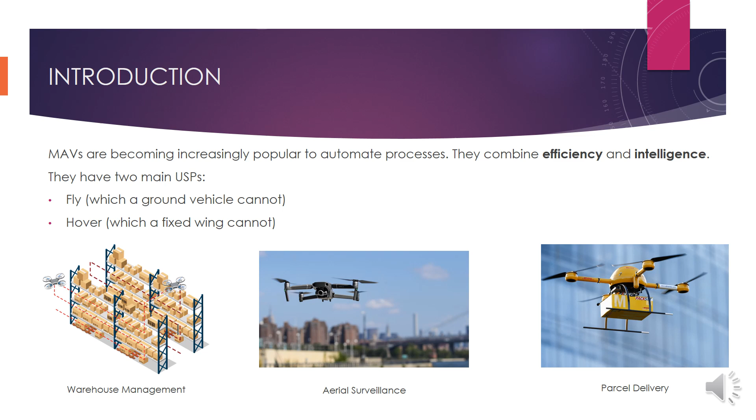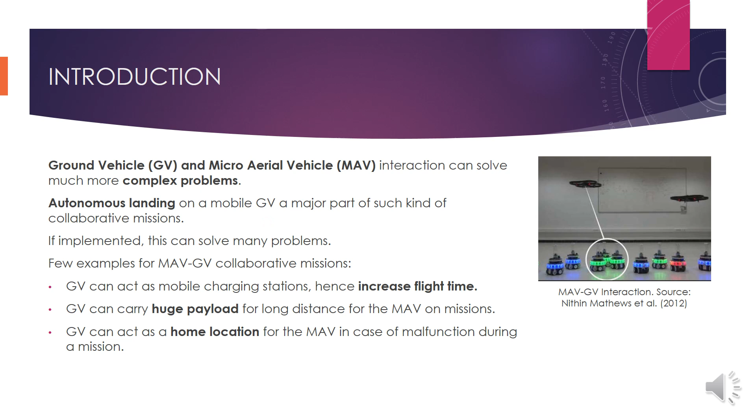So now let me present you an idea for GV and MAV collaboration for much more complex problems. A few examples could be that GVs could act as mobile charging stations to increase the MAV flight time. GVs can also increase the payload capacity of the MAV, and they can also act as home location for emergency landing. But the main problem in such collaborative missions is the landing of the MAV on a moving ground vehicle. And this is the major motivation behind this study, and the motivation is to solve this problem.

So from the literature survey, a few trends in the research can be seen. First is that most of the research has been done for fixed wing UAV landing. Another major area of research has been precision landing of multi-rotors on fixed targets. And whatever research was done for landing on moving targets, there were a few main assumptions. First is that the ground vehicle was moving in a straight line, and second was that the ground vehicle showed a cooperative behavior with the MAV.

So the novelty of this work is to get rid of these assumptions by having no prior assumptions or knowledge of the ground vehicle motion. And second is to develop a wind tolerant controller that makes the system suitable for outdoor operation also.

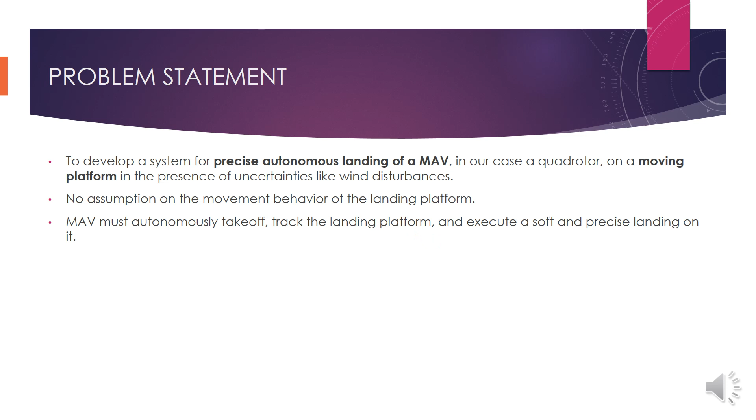So our problem statement is to develop a system for precise autonomous landing of a MAV on a moving platform in the presence of uncertainties like wind and without any assumption on the movement of the landing platform. So in all, our MAV must take off, track the landing platform and execute a soft and precise landing on it.

So now we come on to the methodology part of the implementation. Everything starts with the takeoff of the drone. Then a condition that checks if the MAV is close enough to the GV within a threshold. If not, then it goes on to the tracking phase, that is, it is far and the ground vehicle needs to be tracked. And here path planner one generates the trajectory. When the trajectory is being followed, every time this is-valid condition is checked to prevent the drone from going on a redundant trajectory. So an online update of the trajectory is performed if the trajectory is invalid.

Now, when the tracking is complete and the drone is close to the ground vehicle, then it goes into the catching and the landing phase. Here, path planner two generates a trajectory such that the drone can come very, very close, almost above the ground vehicle, and then land on it.

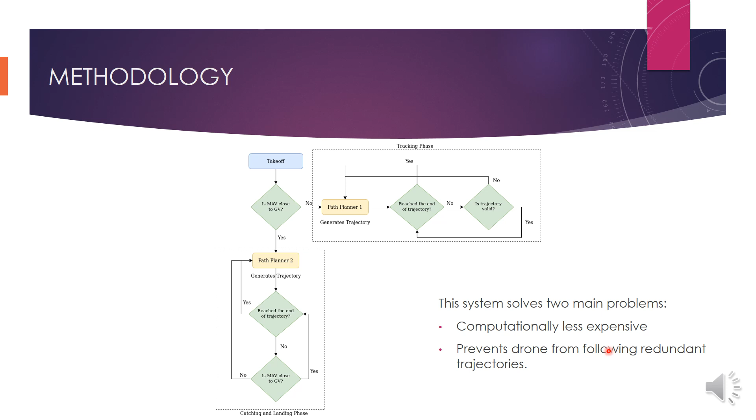So this kind of system solves two main problems. One is that it is computationally less expensive than algorithms like MPC, which perform online computation at each time step. And second is that this prevents the drone from following redundant trajectories using the is-valid trajectory condition.

So now coming to the controller design, the first step in controller design is to define the quadrotor model. So here we have a quadrotor in the plus configuration. E1, E2, E3 is the inertial frame of reference and B1, B2, B3 is the body fixed frame of reference. For the quadrotor dynamics, we have these four equations where the first and the third equation are the position and velocity relations, and the second and the fourth equation come from Newton's second law.

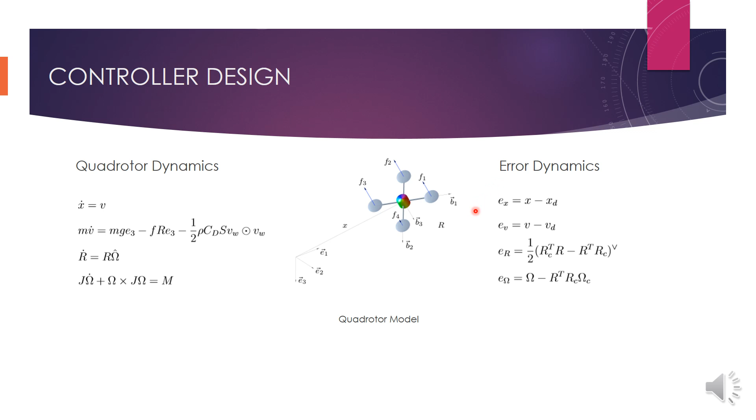For the error dynamics, the error is defined for position, velocity, angular position and angular velocity, where the error is just the current value minus the desired value. As we can see, for the controller design, the dynamics has been decoupled into a force controller and a moment controller. For the controller design, I've used Lyapunov theory, for which three Lyapunov candidates have been defined. These candidates are just the total energy relations, where nu1 is for the force controller, nu2 is for the moment controller, and nu3 is for the entire system.

The control laws F and M are derived from the Lyapunov candidates, and the constants in the control law are derived from the Lyapunov candidate derivatives.

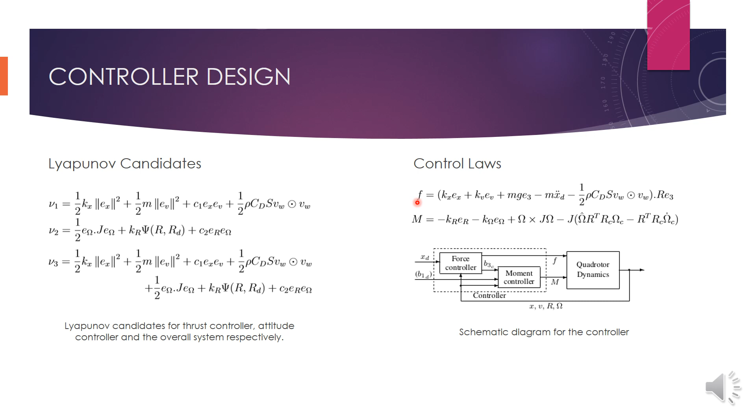For testing the controller, several simulations were conducted. On the left side, the wind direction is in the positive x direction, and the red line is the ideal line, which is in case of zero wind, and the green line is the trajectory in the presence of our controller, and their overlap shows that the result is very good. The blue line shows that if the wind rejection was not there, then there would have been a lot of drift.

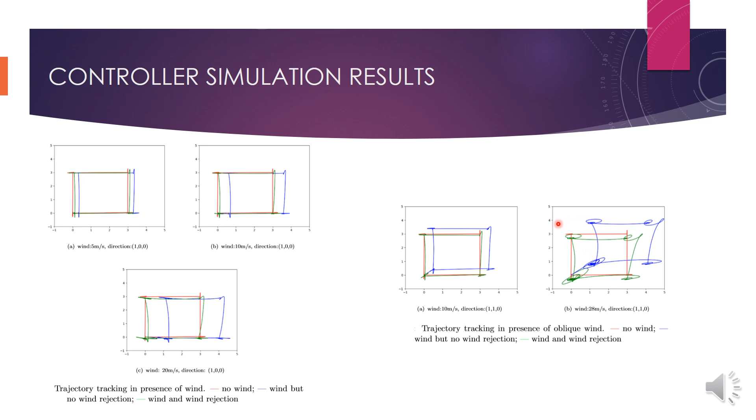Same is for the case where the wind direction is in the xy direction, but in case of speed of 28 meter per second, we can see that there are some oscillations, and this is because the wind speed is so high that the limit of motor speed is reached to give the acceleration. So this problem can be solved by just using some high power motors.

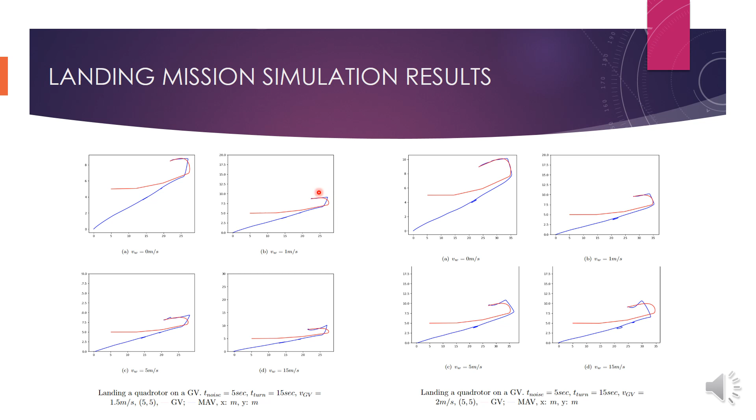Now in this case, the randomness is increased by increasing the frequency of the noise from 15 seconds to 5 seconds. Now in this case also we can see that in all the cases the tracking takes place and the MAV is able to land on the GV very precisely. Now to increase the randomness in the trajectory even further, along with the 5-second yaw noise between 0 to 20 degree, at every 15 seconds a 180-degree turn is also imparted to the trajectory, which can be seen in the red line. But in this case also the online trajectory updation takes place at the correct time, and in each case the MAV is able to land on the ground vehicle.

So now moving on from the simulation results, I present you a simulation video. So as we can see, the drone takes off and the ground vehicle is moving. Now the tracking phase is going on. Now the MAV is trying to get close to the GV. Now it is close. So now the catching will take place and the landing takes place.

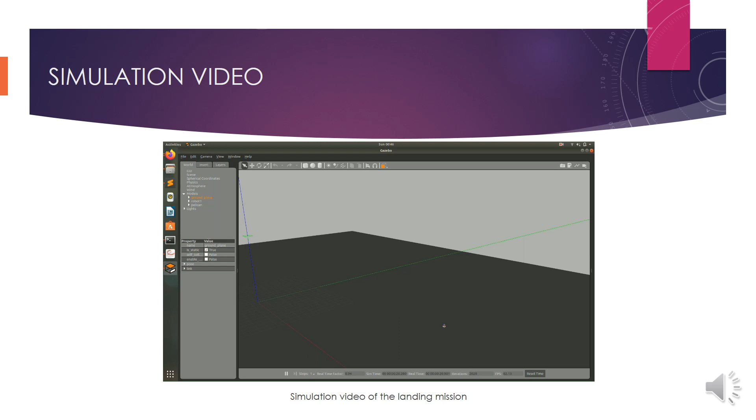So to conclude, in this work, an idea for integrating a MAV and GV for complex missions was presented. To achieve this, the problem area, that was the landing of a MAV on a mobile GV, was identified, and a solution for that was proposed by dividing the landing sequence into two phases. A wind-tolerant Lyapunov-based nonlinear controller was presented, and with the help of simulation results, its effectiveness was shown. Then path planners for each phase were developed and their algorithms were discussed.

And then the simulations for the entire landing mission were performed for different permutations of ground vehicle speed, wind speeds, and the trajectory noise and randomizations. And it was seen that the MAV was able to land perfectly in all the cases with wind speeds up to 15 meter per second. And a video of the simulation was also shown.

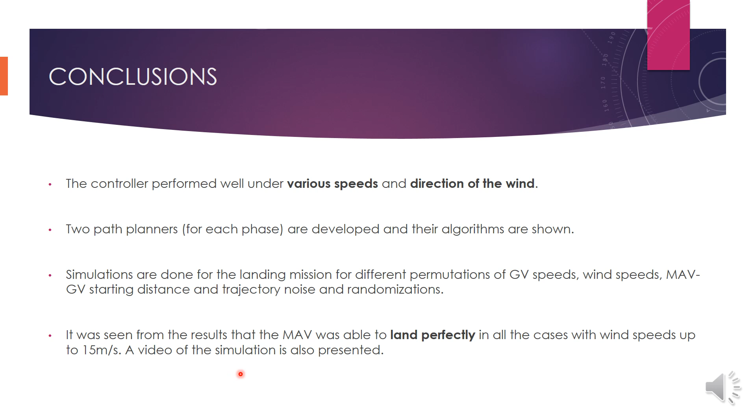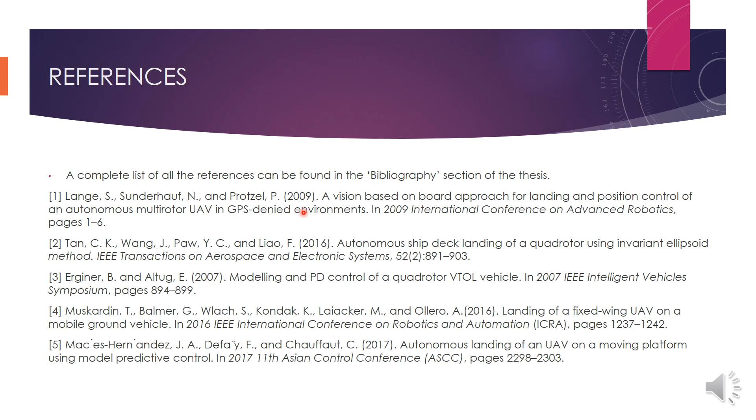So this is the list of the references used in this presentation, and the complete list can be found in my thesis. And this brings to the end of the presentation.